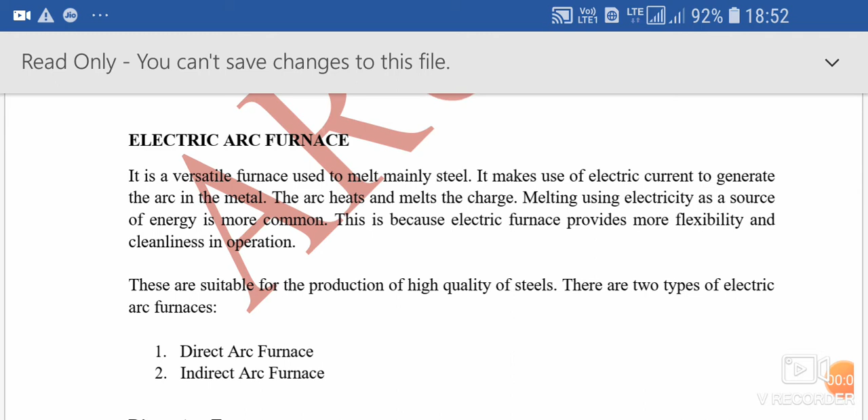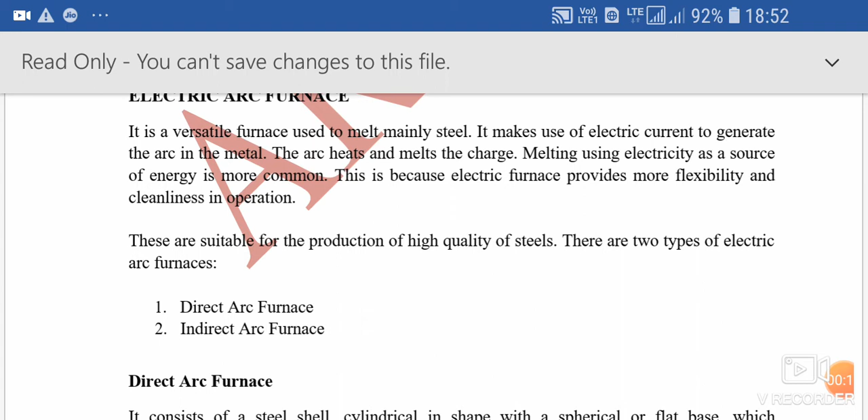Electric arc furnace is a versatile furnace used to melt mainly steel. It makes use of electric current to generate an arc in the metal. The arc heats and melts the charge. Melting using electricity as a source of energy is more common because electric furnaces provide more flexibility and cleanliness in operation. These are suitable for production of high quality steels.

There are two types of electric arc furnaces: direct arc furnace and indirect arc furnace.

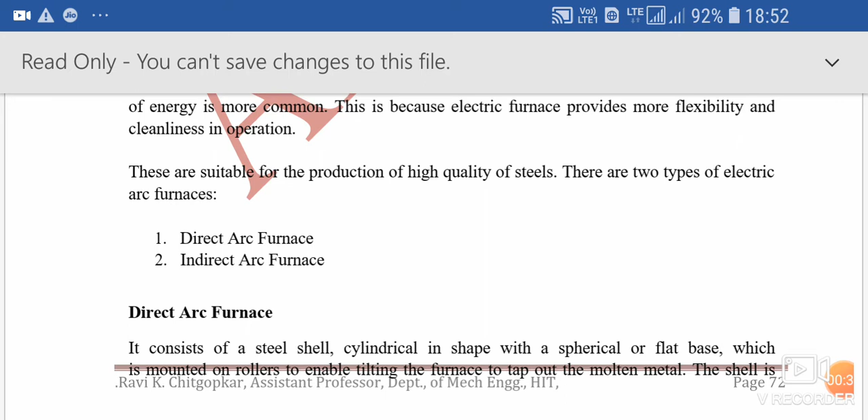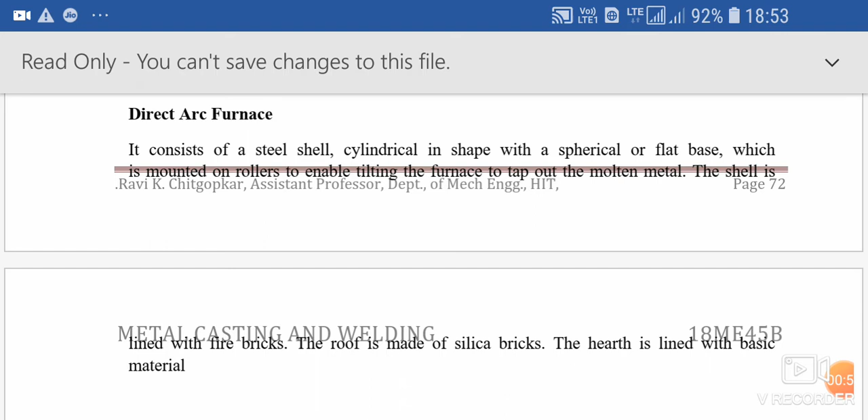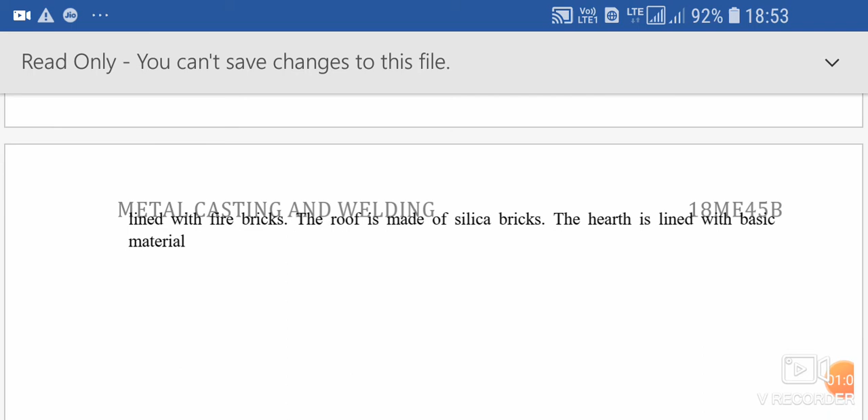Direct arc furnace consists of a steel shell, cylindrical in shape with a spherical or flat base, mounted on rollers to enable tilting the furnace to tap out the molten metal. The shell is lined with bricks. The roof is made up of silica bricks. The hearth is lined with basic materials such as magnesite bricks.

The charging may be done either from the top or from the side. In top charging type, the roof can be swung along with the electrodes, while in side charging type, a side door is provided. A tapping hole with spout is provided to tap out the molten metal.

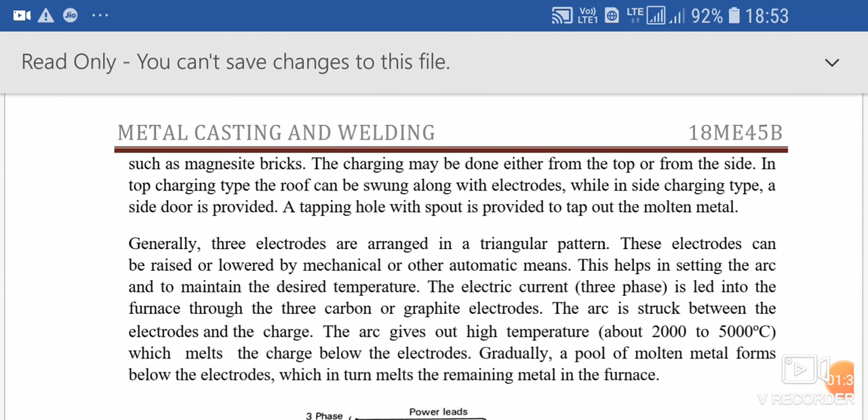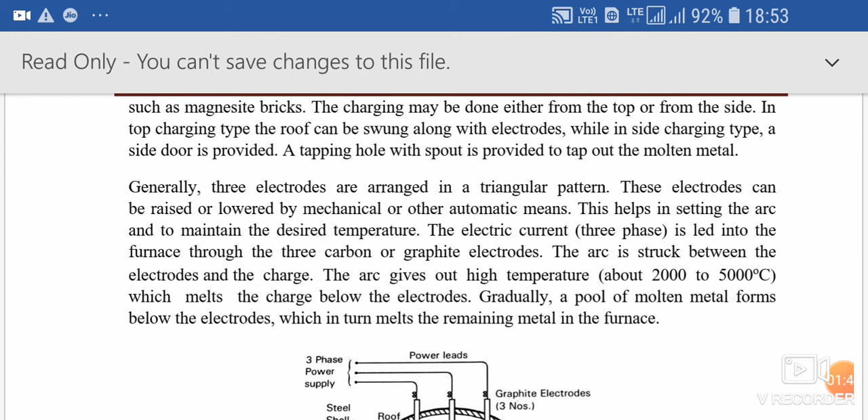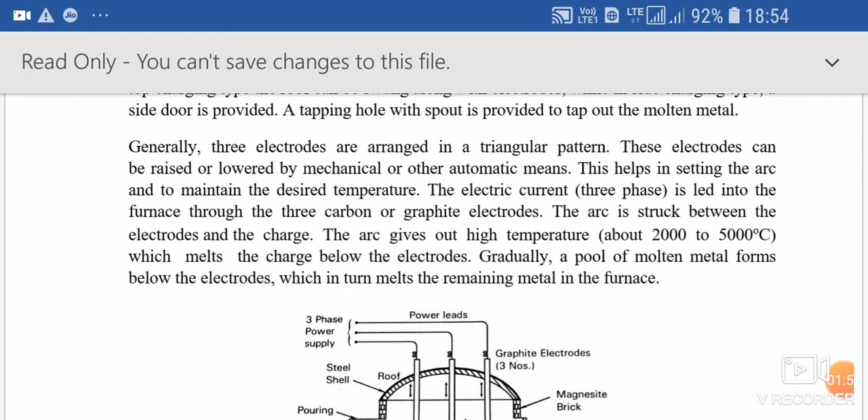Generally, three electrodes are arranged in a triangular pattern. These electrodes can be raised or lowered by mechanical or other automatic means. This helps in setting the arc and maintaining the desired temperature.

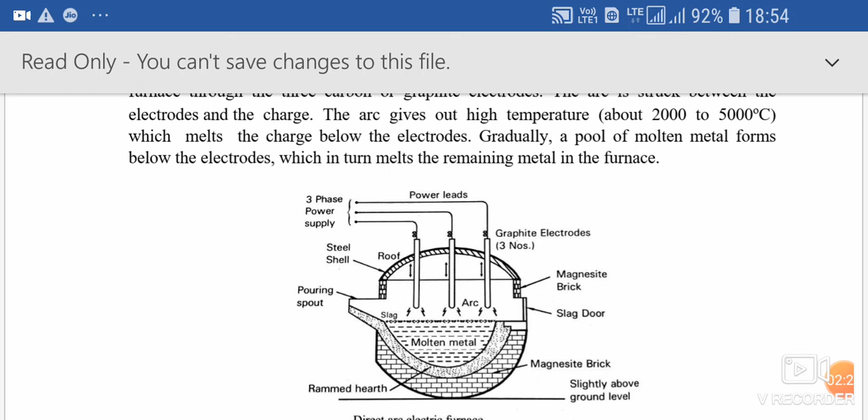The electric current, three-phase current, is led into the furnace through three carbon or graphite electrodes. The arc is struck between the electrode and charge, giving out high temperature of the order of 2000 to 5000 degrees centigrade, which melts the charge below the electrodes. Gradually, a pool of molten metal forms below the electrodes, which in turn melts the remaining metal in the furnace.

The sketch of the furnace is shown, labeled with three phase power supply and three electrodes. You can see the magnesite brick lining inside the lid, and magnesite brick at the bottom is also lined inside.

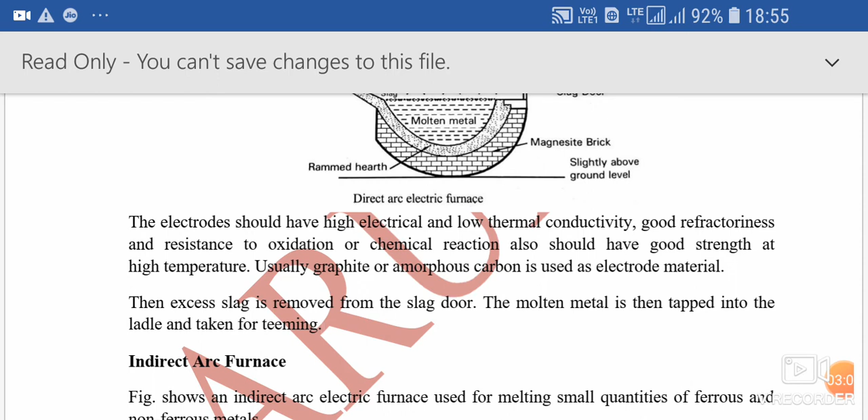The electrodes should have high electrical and low thermal conductivity, good refractoriness, and resistance to oxidation or chemical reaction. They should also have good strength at high temperature. Usually graphite or amorphous carbon is used as electrode material.

Then excess slag is removed from the slag door. The molten metal is then tapped into the ladle and taken for teeming.

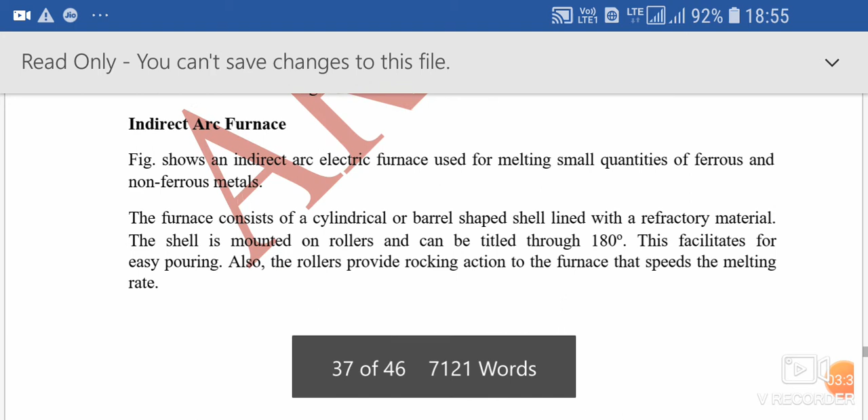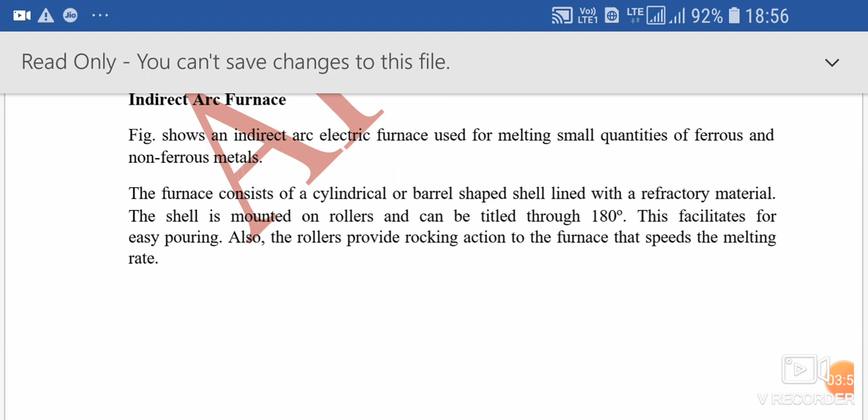Indirect arc furnace: the figure shows the indirect arc furnace used for melting small quantities of ferrous and non-ferrous metals. The furnace consists of a cylindrical or barrel-shaped shell lined with refractory material. The shell is mounted on rollers and can be tilted through 180 degrees.

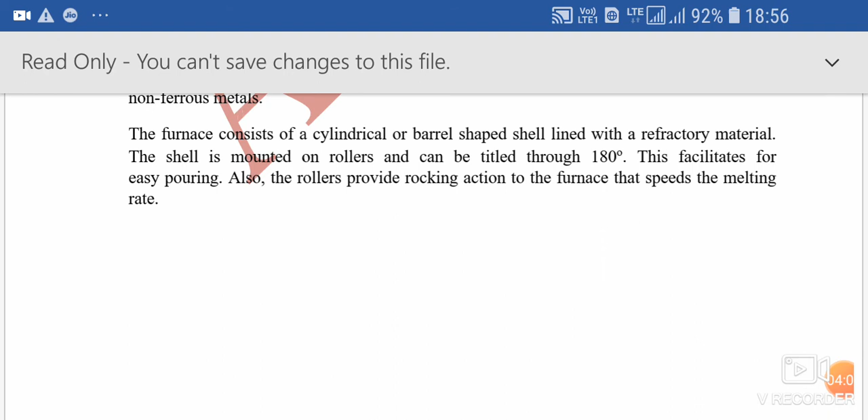This facilitates ease of pouring. Also, the rollers provide rocking action to the furnace that speeds up the melting rate.

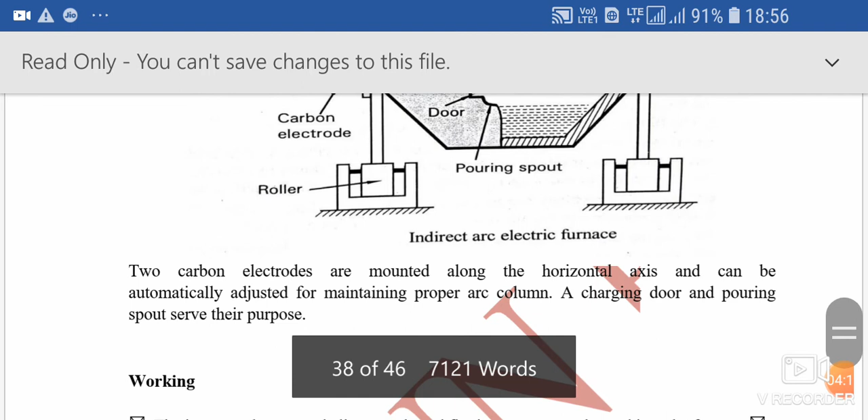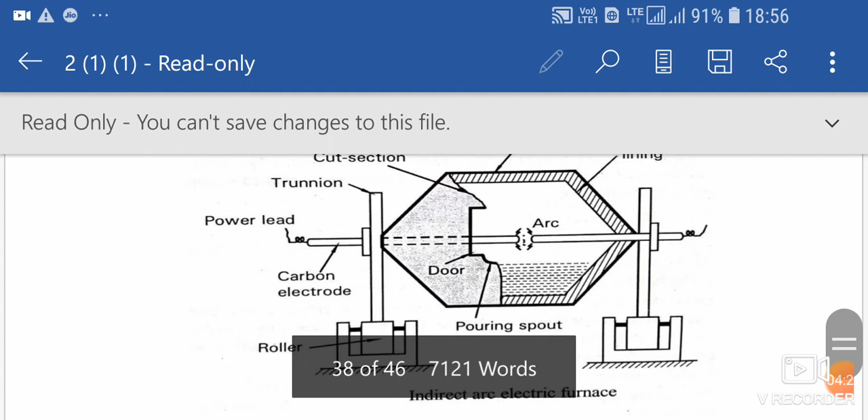The sketch of the indirect arc furnace is shown here. You can easily see the steel shell with refractory lining inside. The cut section shown includes the trunnion, power lead, carbon electrodes, and rollers on either side of the indirect arc furnace.

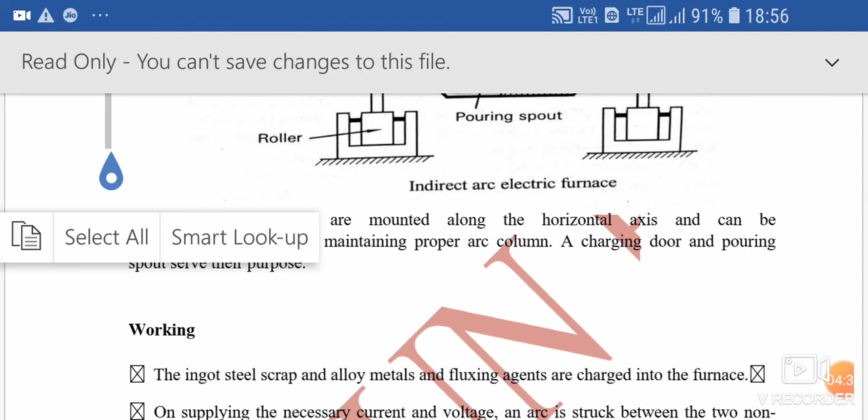The two carbon electrodes are mounted along the horizontal axis and can be automatically adjusted for maintaining the proper arc column. A charging door and pouring spout serve the purpose.

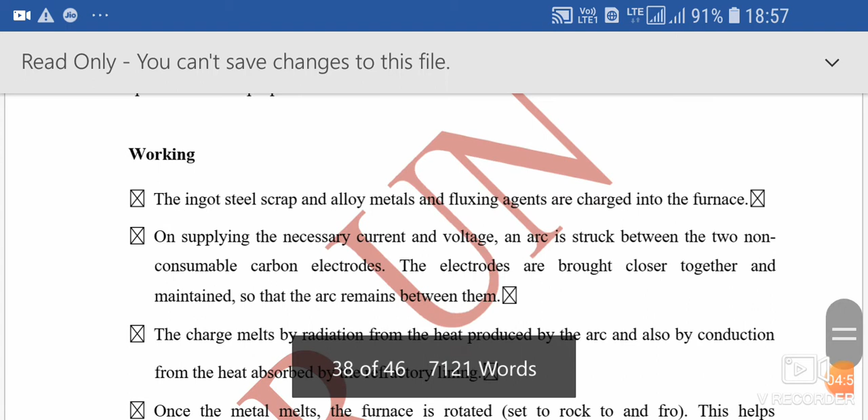Working: ingot steel scrap, alloy metals, and fluxing agents are charged into the furnace. On supplying the necessary current and voltage, an arc is set up between the two non-consumable carbon electrodes.

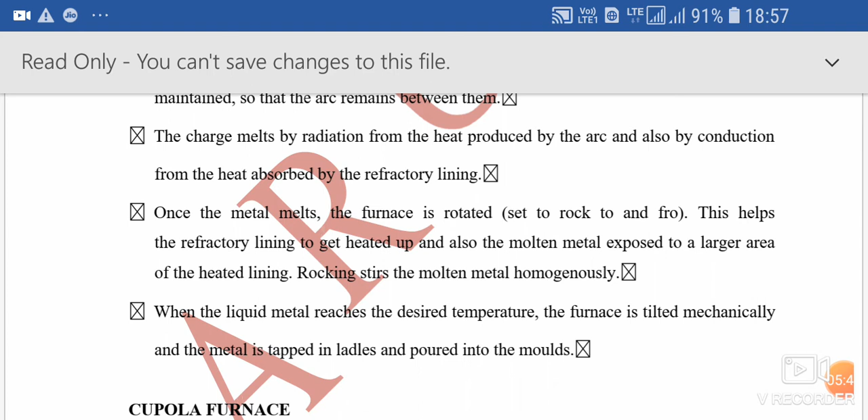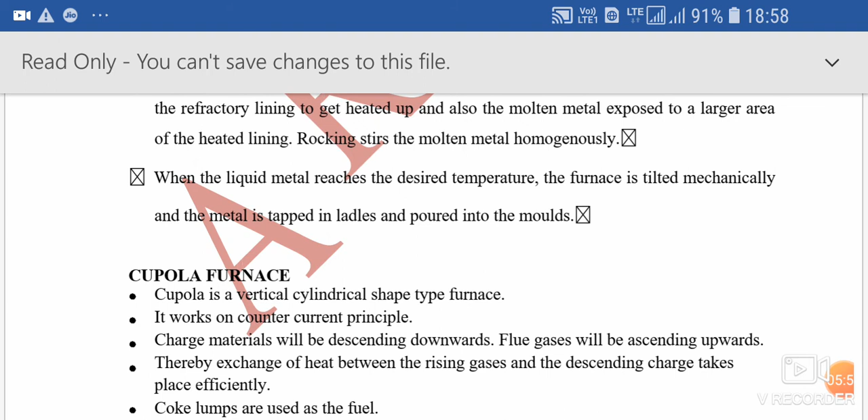This helps the refractory linings get heated up, and also exposes the molten metal to a larger area of the hot linings. Rocking stirs the molten metal for homogeneity. When the liquid metal reaches the desired temperature, the furnace is tilted mechanically and the metal is tapped into ladles and poured into the mold cavity.

Cupola furnace is a very important and old one. Cupola is a vertical cylindrical shaped furnace. It works on the counter current principle: charged material descends downwards while flue gases ascend upwards, thereby exchanging heat between the rising gases and the descending charge efficiently.

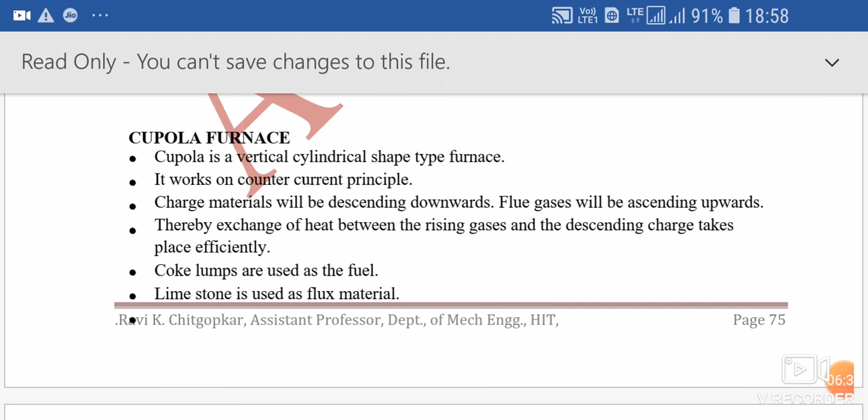Coke lumps are used as the fuel. Limestone is used as flux material. Coke, limestone, and metal charge are charged into the cupola furnace in the same sequence with a definite ratio.

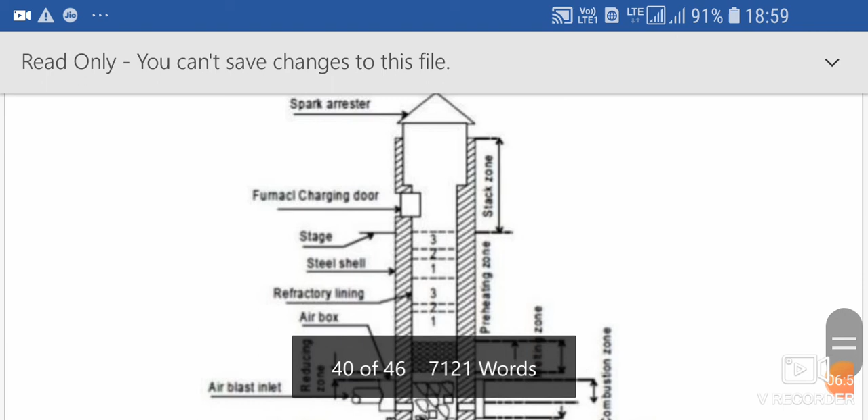Here you can see the complete sketch of the cupola furnace, with the various parts labeled. It consists of a cylindrical shell of large height to diameter ratio, supported on legs at the bottom.

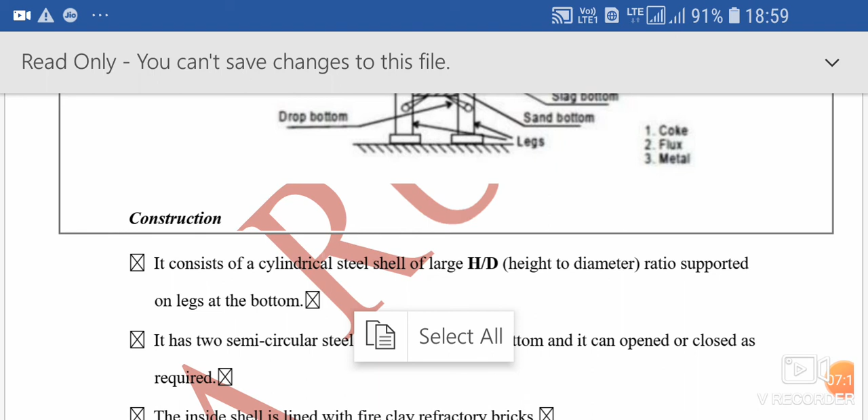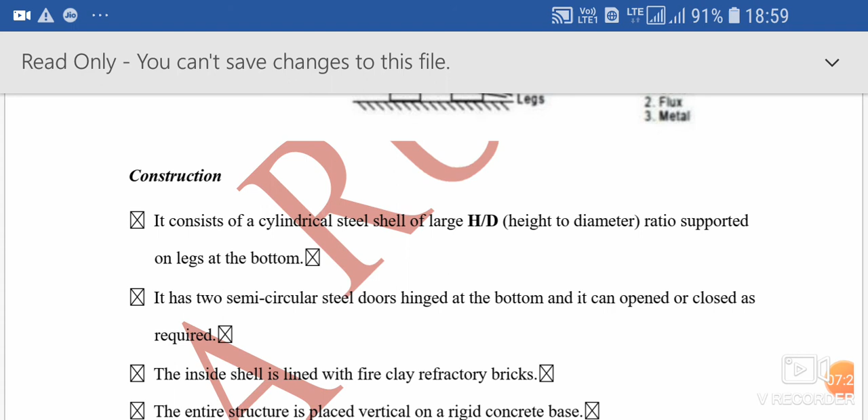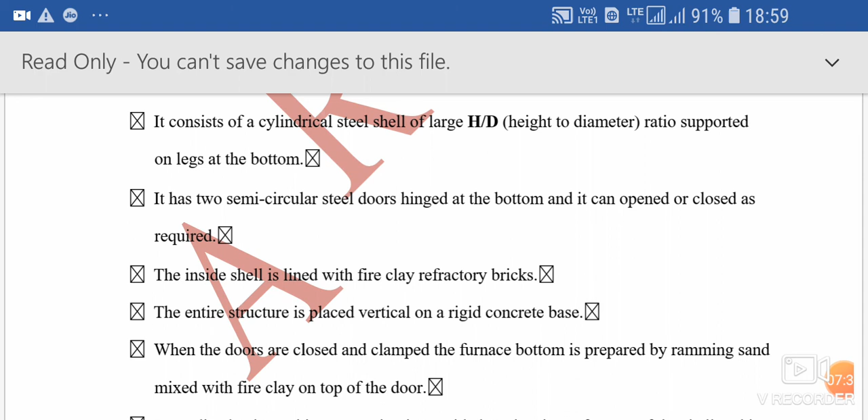It has two semicircular steel doors hinged at the bottom, which can be opened and closed when required. The inside shell is lined with fire bricks. The entire structure is placed vertically on a rigid concrete base.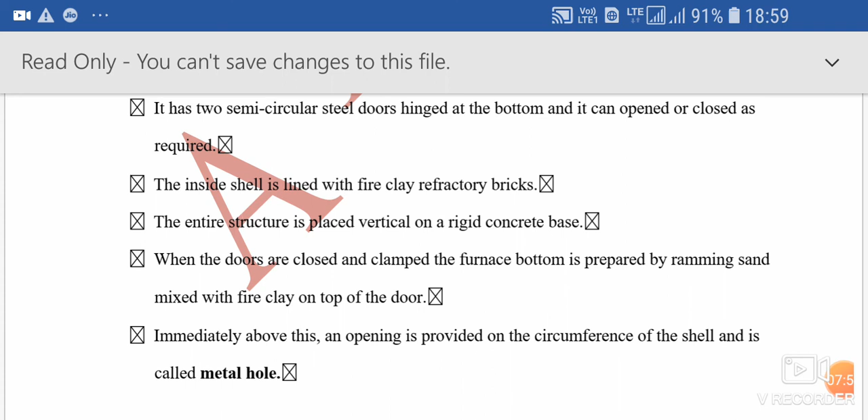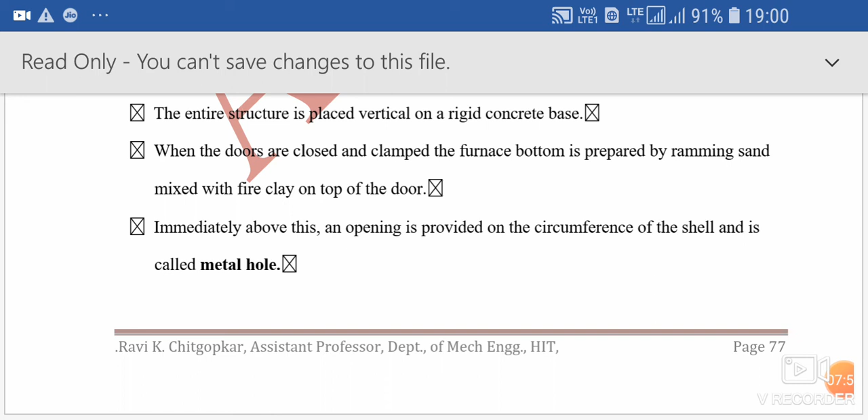When the doors are closed and clamped, the furnace bottom is prepared by ramming sand mixed with fire clay on top of the door. Immediately above this, an opening is provided on the circumference of the shell, called the metal hole.

A small channel is provided corresponding to this using steel plate and refractory material, called the metal spout. Through this spout, molten metal is drawn from the furnace.

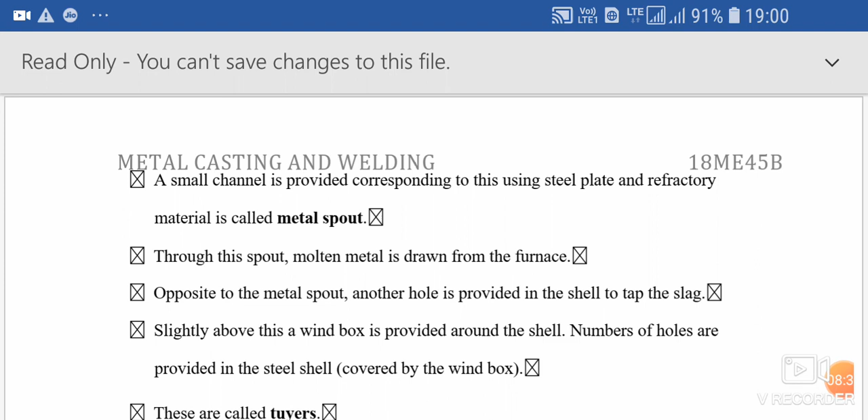Opposite to the metal spout, another hole is provided in the shell to tap the slag. Slightly above this, the wind box is provided around the shell.

Number of holes are provided in the steel shell around the wind boxes; these are called tuyeres. The wind box is connected to the blower, through which air is made to enter.

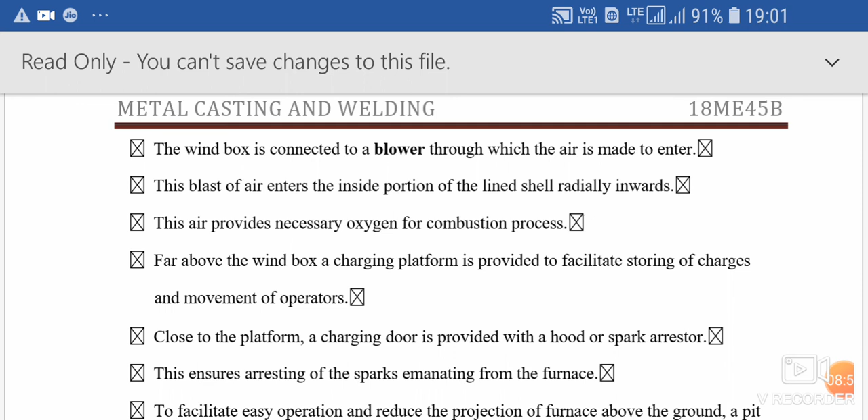The blast of air enters the inside portion of the lined shell radially inwards. This air provides the necessary oxygen for the combustion process.

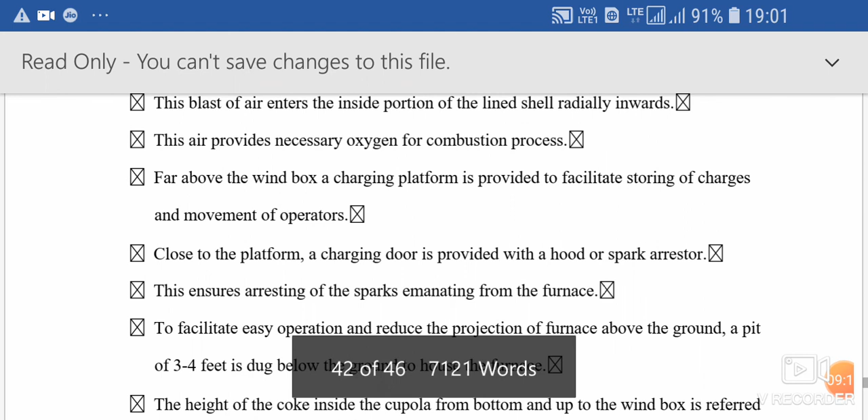Far above the wind box, a charging platform is provided to facilitate storing of charges and movement of operators. Close to the platform, a charging door is provided with a hood or spark arresters, ensuring arresting of sparks emanating from the furnace.

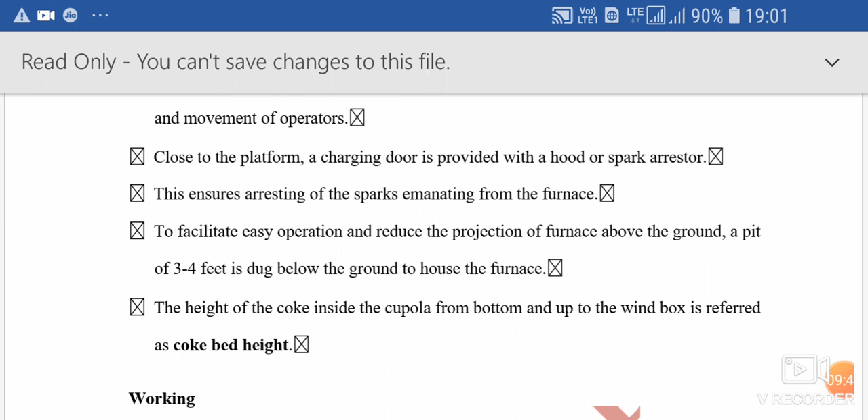To facilitate easy operation and reduce projection of the furnace above the ground, a pit of 3 to 4 feet is dug below the ground to house the furnace. The height of the coke inside the cupola, from the bottom up to the wind box, is referred to as coke bed height.

Working: starting the cupola. Before starting the cupola, the bottom doors are closed and locked. On the door, a sand bed is prepared, and the metal spout is closed with a clay slug.

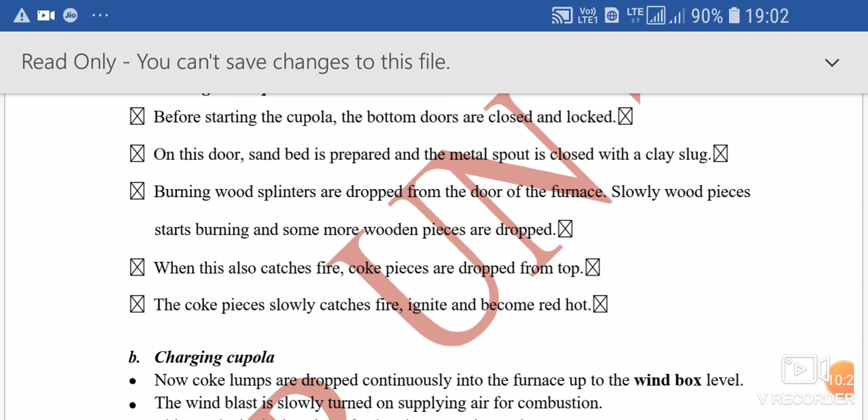Burning wood splinters are dropped from the door into the furnace. Slowly, the wood pieces start burning, and some more wooden pieces are dropped in.